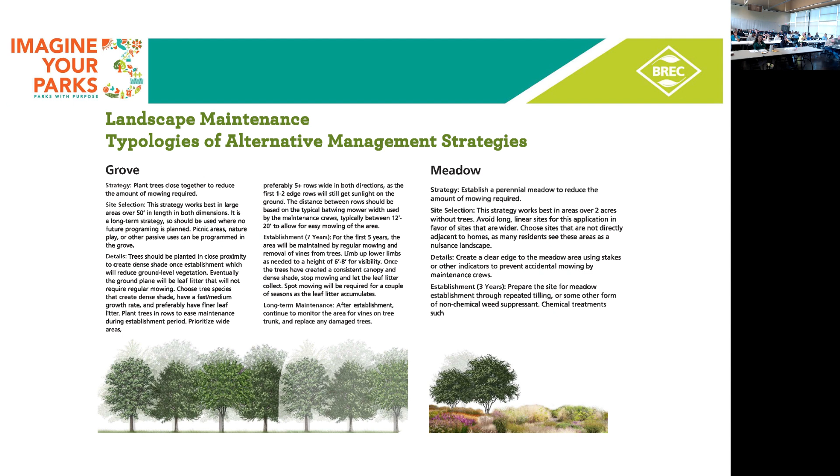When Amanda was at BREC, there was, I believe, also recently a prescribed burn as one maintenance regime. Again, as we implement more green infrastructure into our parks, we need to develop new maintenance regimes for that.

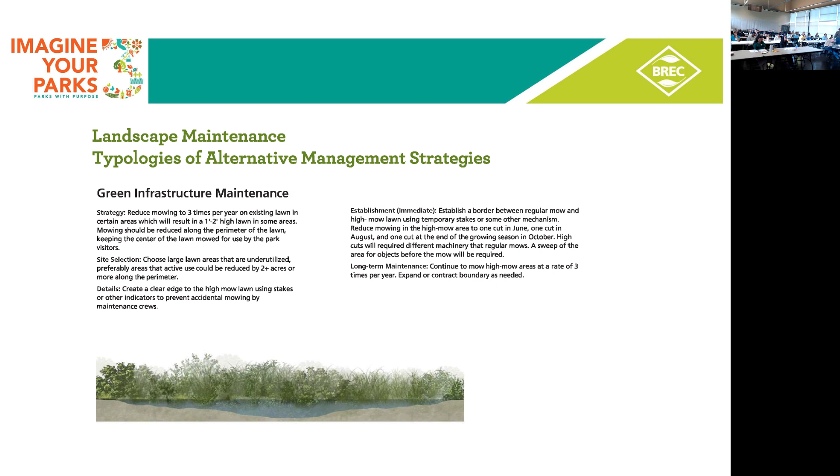So back here at Greenwood Park, a quick overview of the bigger picture of the master plan we have for Greenwood Park and how we arrived here in having a master plan. It all started with our zoo, which is located in Greenwood Park.

It was reaching, now over 50 years old, with a lot of aging infrastructure and aging exhibits that are out of date. We hired a firm to do a feasibility study, and the result was they thought the zoo should be relocated to a place with higher market value that could attract more people. Ultimately that became a very controversial issue, and the decision was to keep it here at Greenwood Park.

The commission voted to do that, and there was a lot of citizenry, including the mayor, that wanted that to happen. So we proceeded into having a master plan for this park and for the zoo, and we hired a consultant, Sasaki Associates, landscape architects, with a very large team of sub-consultants, some of them local. We went through a process similar to the system master plan, with a lot of community engagement. Ultimately, we flipped the script from controversy and negativity to excitement and support, and had a big celebration and unveiling of the master plan after it was complete.

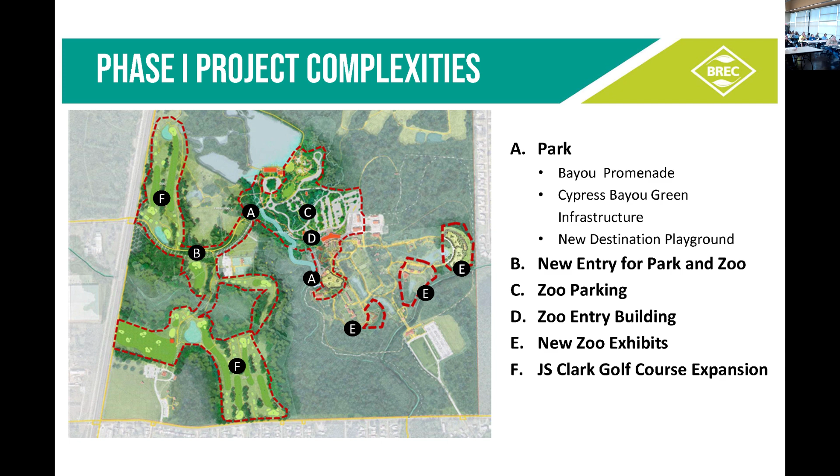So back to what we did in phase 1 in terms of bayou restoration - creating more stormwater capacity, holding water, slowly releasing it, and cleansing water.

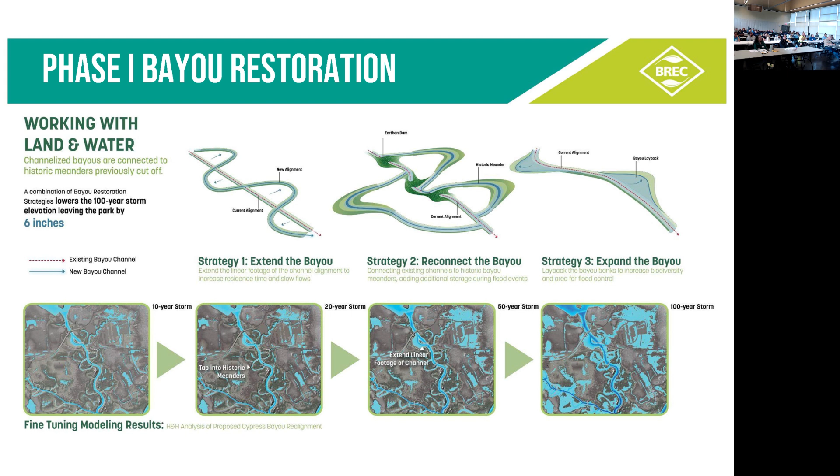This is another nice graphic, and I have to say all of these graphics credit goes to Sasaki Associates and DDG Partners, a local multidisciplinary firm here in town. This shows, in the photo below, that the bayou was originally very channelized, and on either side were these remnants of the historic meanders, which we reconnected.

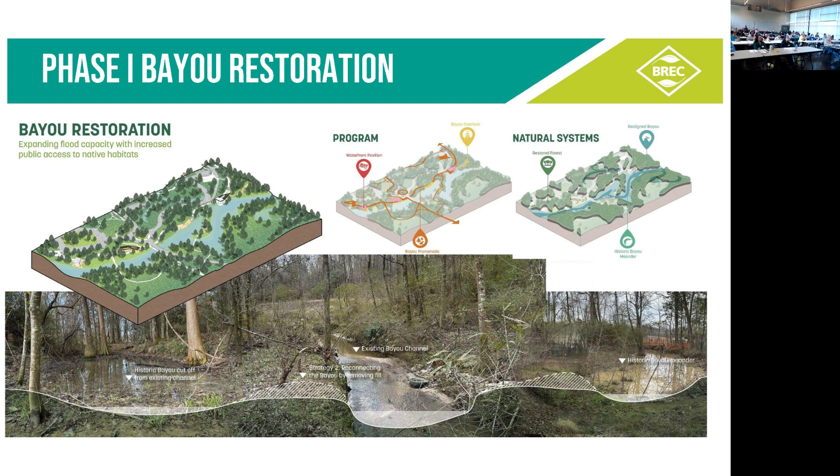This slide is a little more detail on some cross sections of what that looks like, building shelves when the slope is laid back, with lots of new native vegetation, native trees, native shrubs, grasses, and we'll talk more about that. Sharon, our natural resource management lead, will be taking us on a stroll.

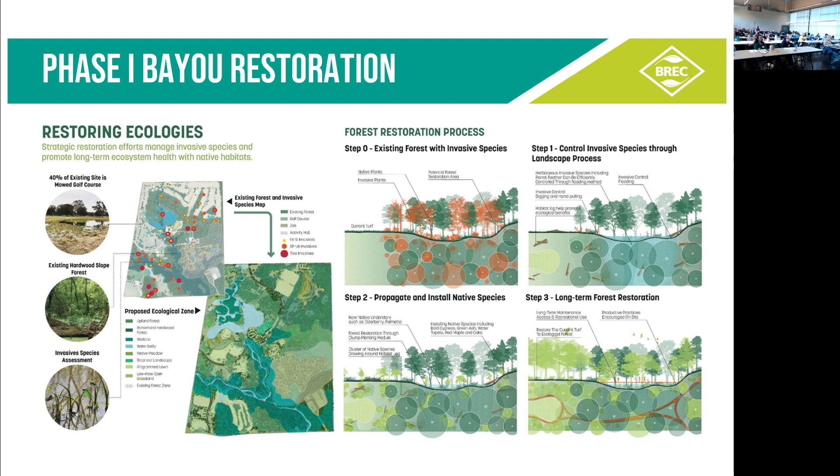All of this work involved an Army Corps of Engineers permit, because we were basically doing a lot of reworking of a waterway that was waters of the U.S. It also required a parish floodplain permit.

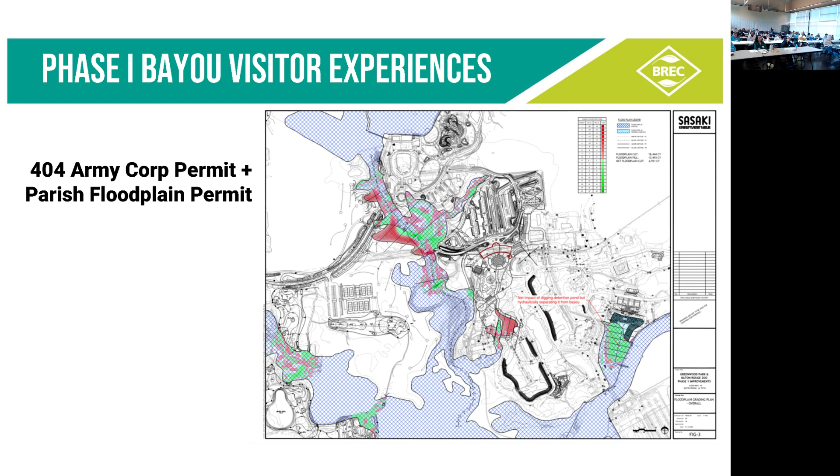The residual benefits of all this were also a lot more recreational opportunities, more bayous and more sections of bayous that can be canoed, and also phase 2, which is going to include the lake, making a lot more recreational opportunities on the lake.

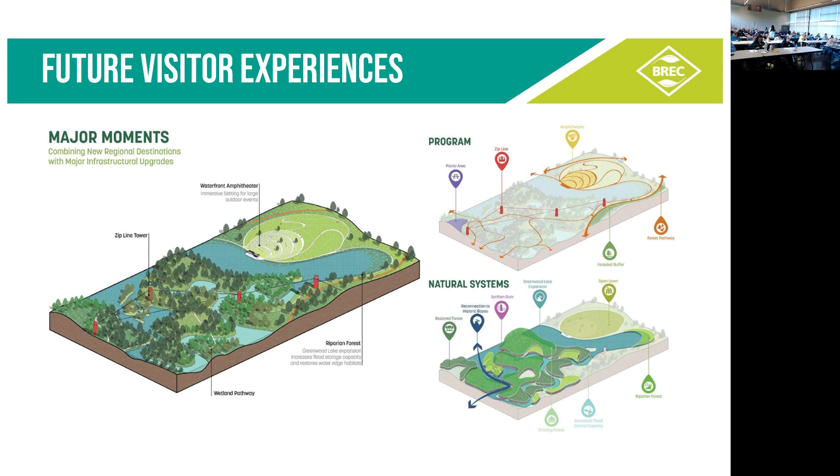Also as part of that, decommissioning of an 18-hole golf course, dredging, the spoils that creates, the earthwork and the excavation. We're going to be creating landforms on the northern part of the park for more nature-based experiences, canopy walks, even zip lines, just a lot more nature-based recreation and experiences.

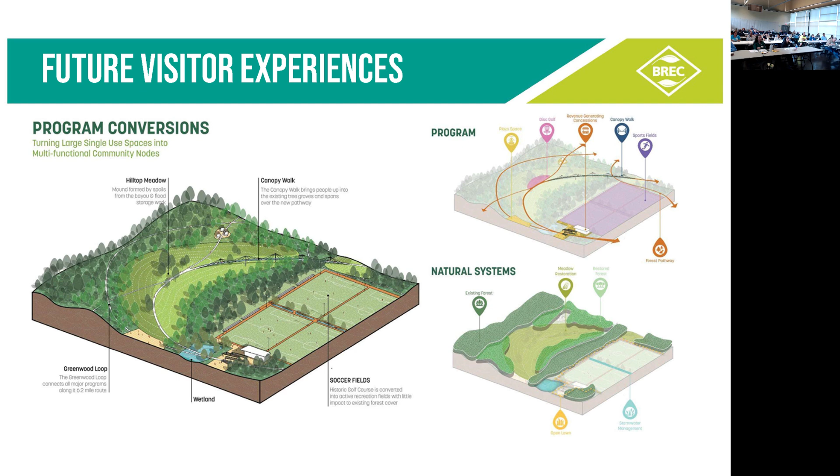Also, going back to educating the public about our natural systems and how parks are very beneficial from an environmental standpoint. One thing we had to value engineer out of the first phase was some offshoots of the Bayou Promenade, which we did build, that meandered a bit and were more like stopping moments - really cool pavilions lower down towards the bayou itself, places for respite, places to host events and gatherings, and a lot of educational information.

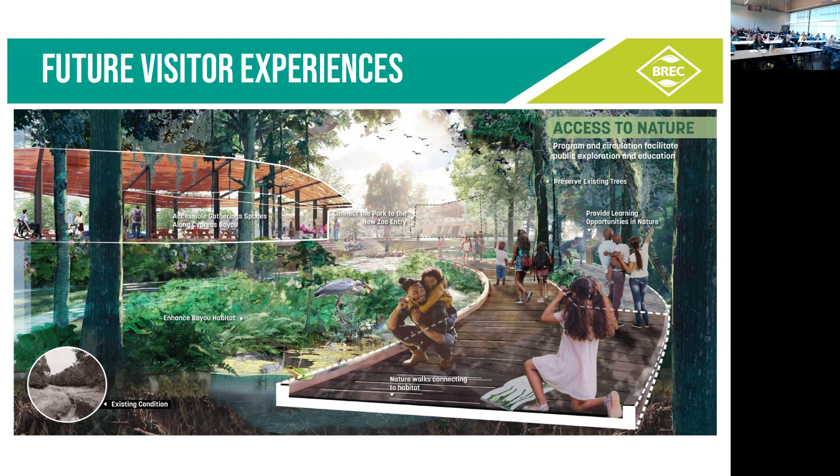Even our playground had to be scaled back - it was actually going to be twice as big as it is now, and we hope to do that in phase 2. The playground was going to extend more into the adjacent wooded area, so it would be more of a nature adventure type playground for the kids.

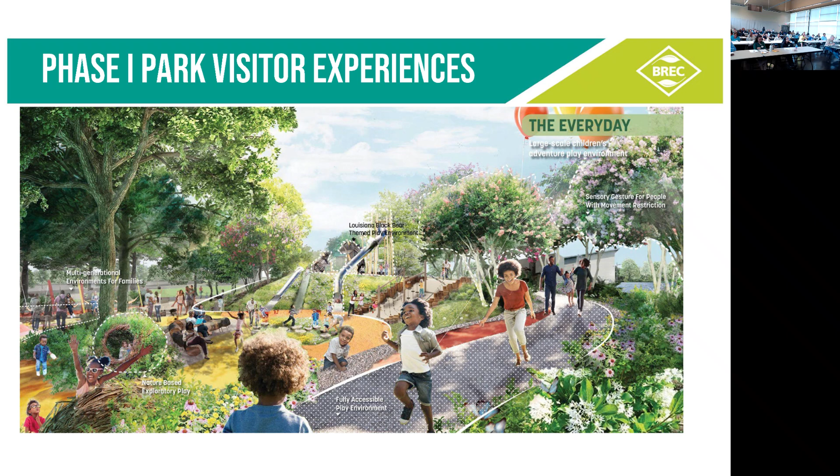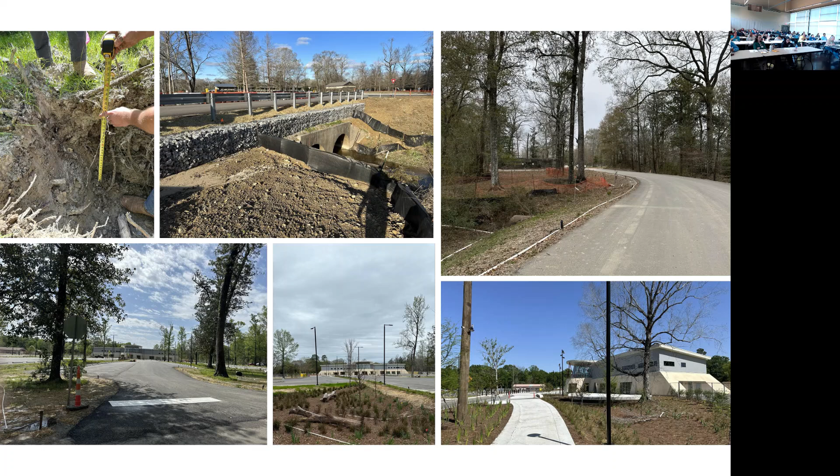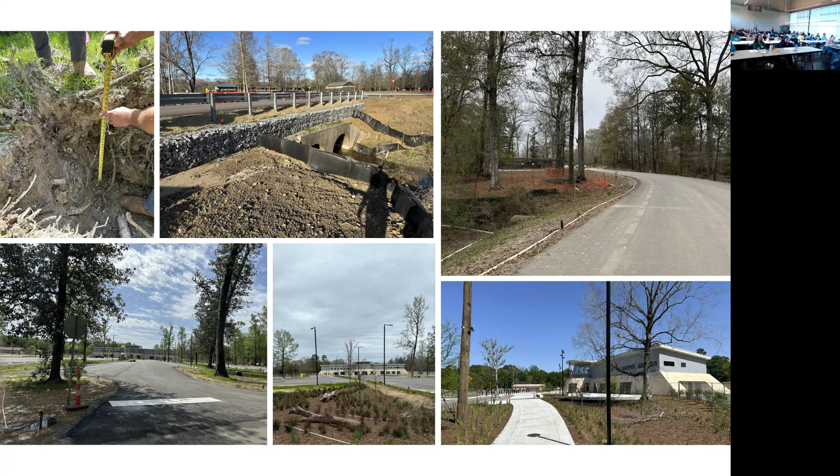Here you can see there was a lot of earthwork done. Jute mat was laid down, along with lots of native grasses, plantings and trees. Gabion walls were also put in along New Entry Road, and some of the other smaller green infrastructure interventions were part of the overall design and construction.

This is the zoo parking lot. In between the big parking stalls, we had bioswales, where all the runoff from the parking lot is directed to these bioswales to treat the water, cleanse it, improve water quality, and also slow down stormwater runoff.

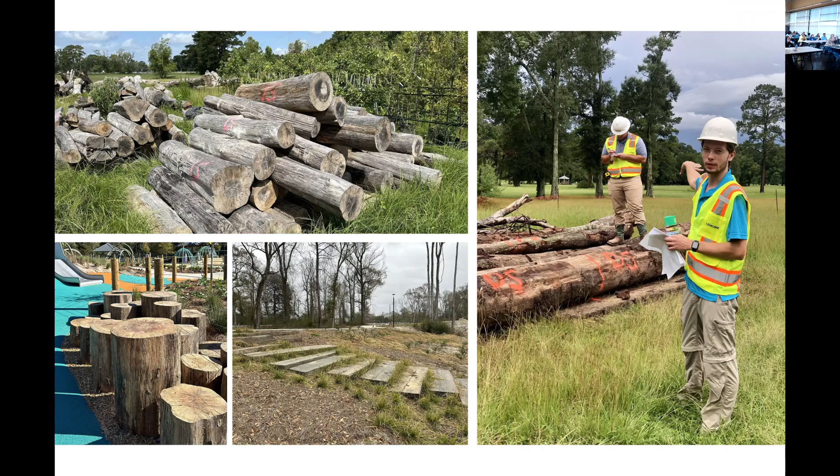There were some trees that were required to be felled, and these were cut up and used as remnants in a lot of the bayou area and other parts of the park to create more habitat. Some of them were also treated with a special environmentally friendly treatment and used purposefully in the playground area, and also for some steps that go down to the bayou off of the bayou promenade, which we might swing by and see.

Again, these are the native plantings, the green infrastructure that also extended to the playground. This was shortly after it was completed, about 9 months ago. A lot of those plants have grown in a lot more than you see here. The trees are mostly sweet bay magnolias, but eventually, as these native plants grow in more, they'll help reduce the amount of invasives and other weeds.

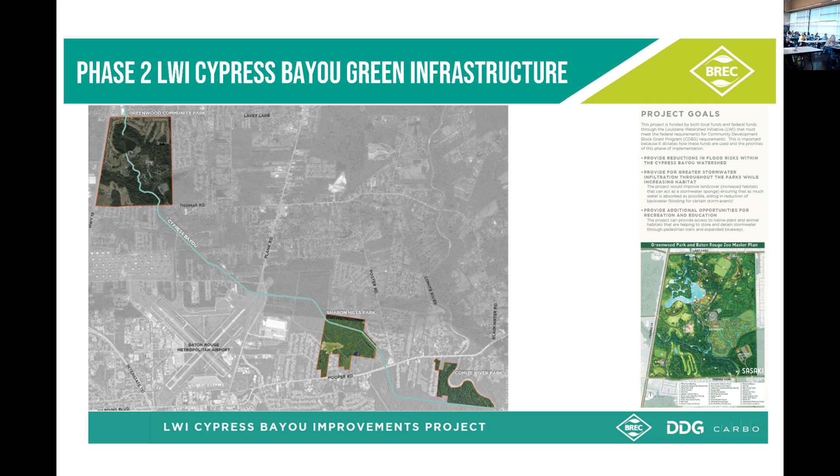But here at Greenwood, as you may have seen already if you step outside in the back, the lake is in very poor health. It's similar to the lakes, the university lakes around City Park and LSU. Lots of sediment buildup. You can no longer really recreate in it, and it's probably a foot or less deep throughout.

So this project is going to dredge that lake and even expand it to create more capacity for stormwater, and also apply the same kinds of concepts and treatments on the northern part of Cypress Bayou that were used in phase 1, creating a forebay at the

northern end upstream. The forebay will be similar to what is also happening at the University Lakes, where sediment from hardscape, roads, and rooftops is brought in and intercepted by the forebay, which will be much deeper than the lake. The sediment will settle out, helping cleanse the water, which will then return back into the bayou.

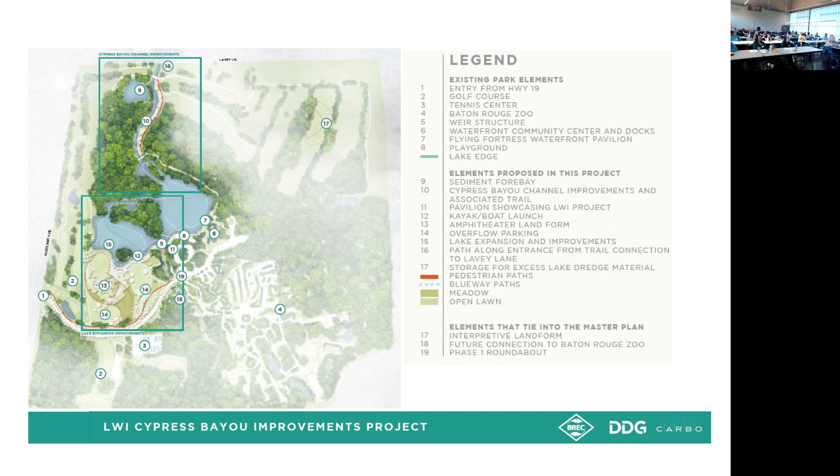And this is again some of the benefits. This was H&H modeling done by our engineers who worked on this plan. The weir is also going to be modified to be a foot or two lower than it currently is, to allow more freeboard in the lake.

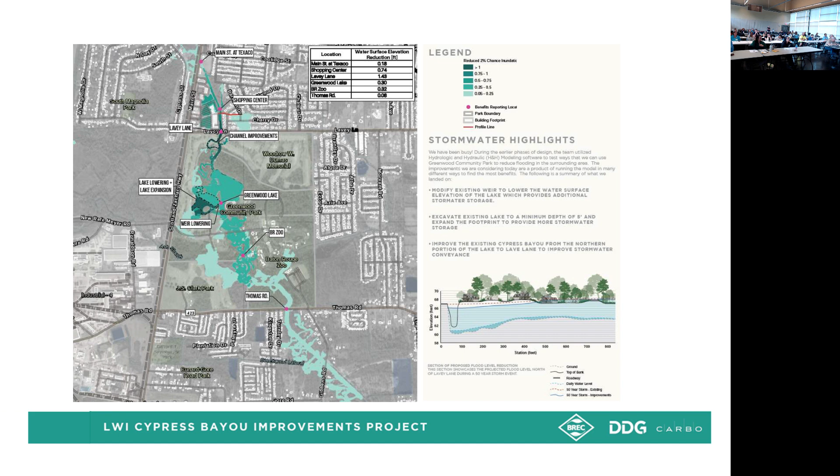The lake is going to be dredged to be about 5 feet deep, and that freeboard will allow for more storage capacity during severe rain events. Again, doing these same things that we did for Cypress Bayou here in phase 1, to the north to Lavey Lane.

This is a close-in shot of the northern area where the bayou enters the lake. There's also going to be a promenade along the bayou. Currently, the bayou in this area is more channelized than what's seen here, so we're creating meanders and broader slopes, as you see in that section, with a lot more recreational opportunities, probably a canoe launch up closer to where the forebay is.